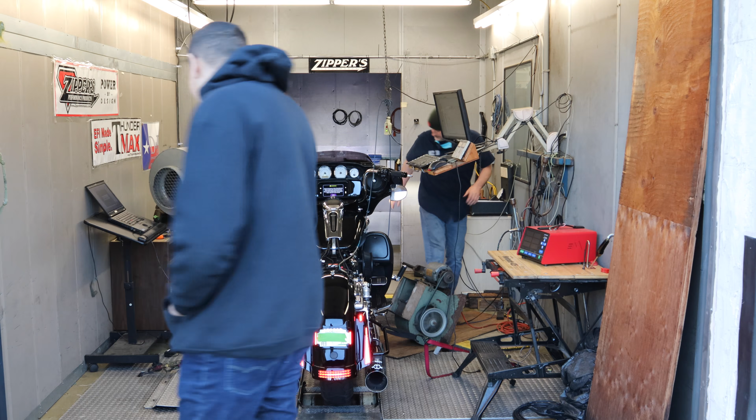Sounds good, I have to admit. I hope it doesn't change the sound too much when I put the baffles in, because with no baffles it sounds great. Now if you're looking and say it looks a little different, it's because I don't have the tips on this. This is the tip right here. First dyno run, no baffles.

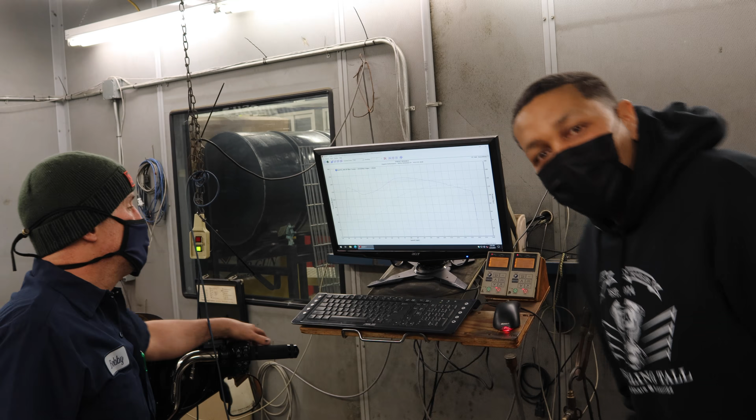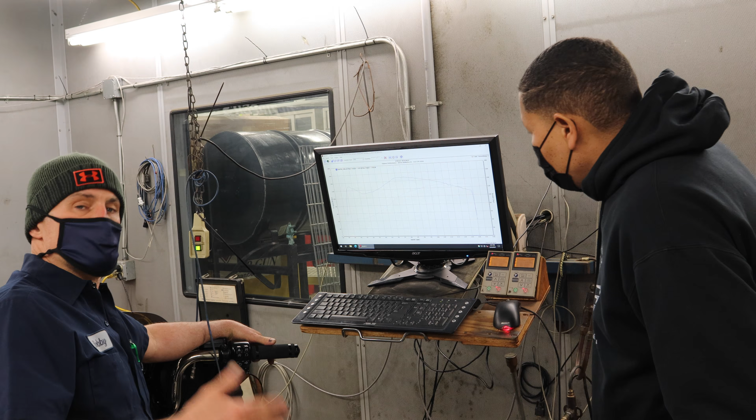Okay guys, so we're inside. We're about to look at the dyno sheet and Bob's going to explain it to you. So this is the first one with no baffles. What we wanted to do was have a baseline of where we started. And what we see here is it made pretty good power, 129 horsepower corrected SAE, and it made 149 pound-foot of corrected torque between 3,500 and 4,000 RPMs. That's a lot of torque.

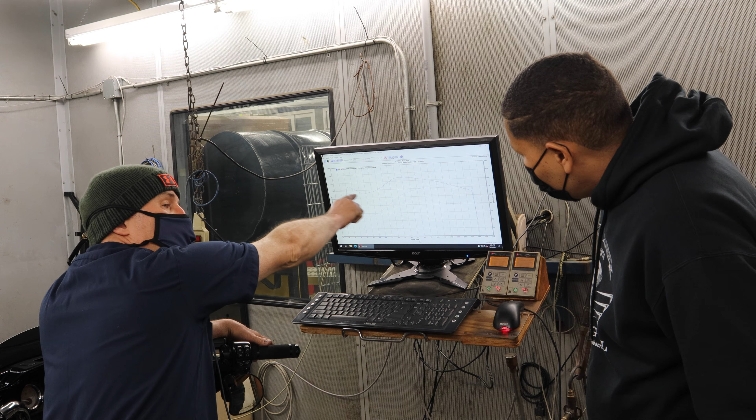But let's see where you ride the motorcycle and what it means in reference to wheels or speed. So I make my runs in 5th gear so I don't overspeed the tire. You could add 5 or 6 miles per hour to this, but you're talking about 55 to 60 miles per hour, you're right here in this torque dip. Which is going to give you the sensation that you have to downshift and feel like you have to keep opening the throttle to get the bike to move, because your power and torque starts up here.

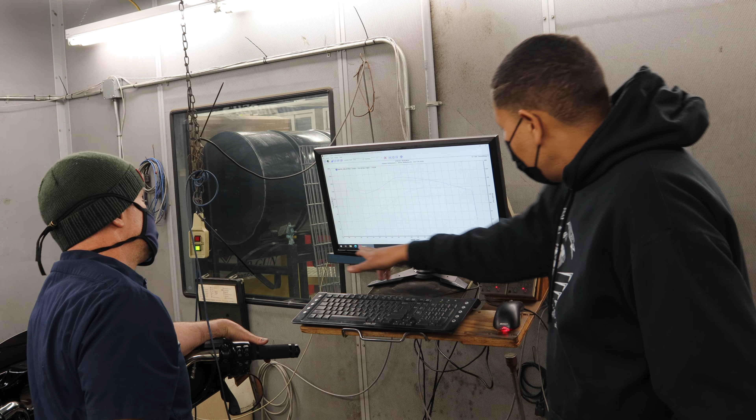Just to say, this is miles per hour down here. And right here, at 50 miles per hour, I'm at my lowest point. What do you think that's about, 110 or something? 111. Okay, now can you put it at RPM so we can see that?

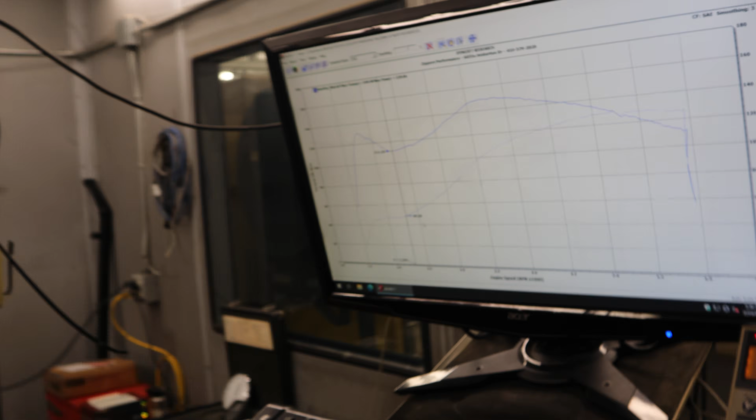Guys, I know you can't see that, let me show you a little bit better. Can you guys see that right there? Point at it, Bob. Yeah, I'll get the cursor back up there. So, cursor, it's 111.25 pound-foot of torque. That's a huge dip. Huge dip, okay. And what we're trying to do, well, yeah. And just so everybody knows, we use an SAE correction factor with that, that's not the actual number, so there's no confusion there.

All right guys, so I'm going to step out of the way and let Bob see which baffle is going to be best. And when I come back, then we'll see which one he chose. All right, see you in a minute.

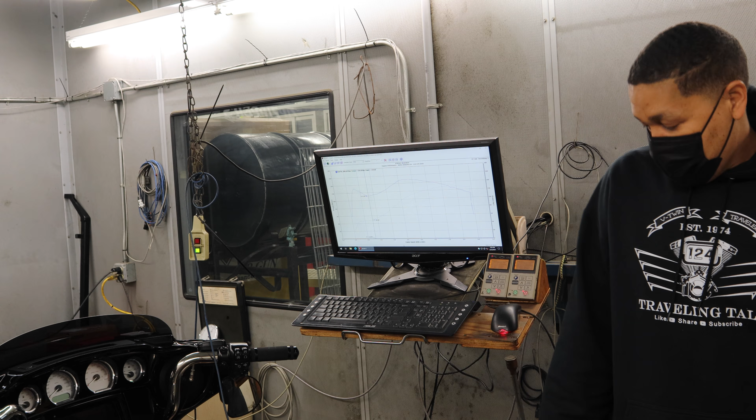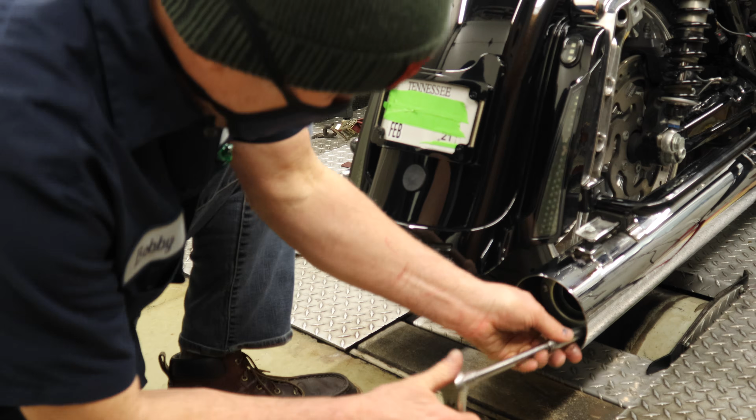Okay guys, I'm back. Now he tried both, and he decided on this one baffle. He said it's the best for my riding style. He's going to put it back in now, and you'll hear the bike with the new baffles, and you'll also see the dyno run with the new baffles. We'll tell you which one he went with in just a moment, but he's going to start it up, give you a dyno run, and here we go.

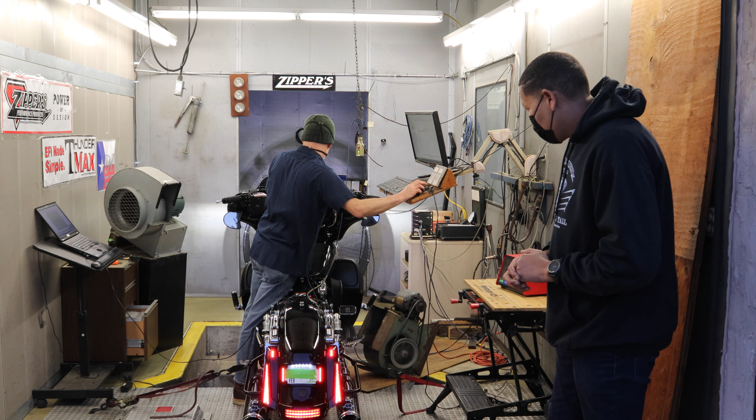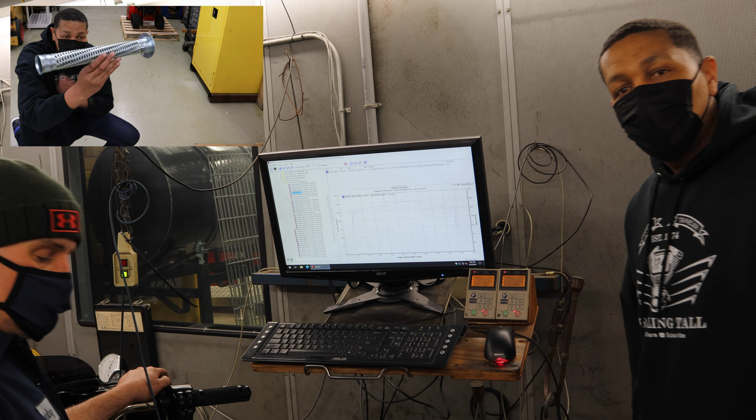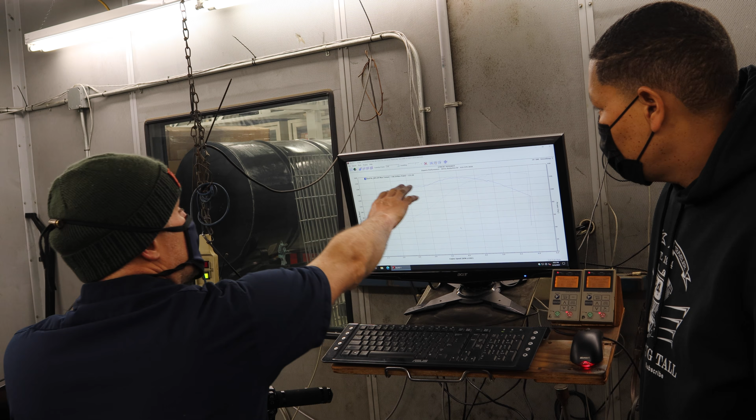All right guys, I got Bob here, and he's going to show me what we're making for horsepower and torque with the new baffles. I didn't tell you which ones we chose, so I'll let him tell you which ones we chose, and he'll tell you about the horsepower and torque. We put the louvered baffles into the mufflers, made a few dyno runs, and here's where we are. Right now we made 148 foot-pounds of corrected torque and almost 132 horsepower.

Corrected, 131 and a half. But here's where the biggest difference is going to be, in the drivability. So I'll show you what we had when we ran with no baffles.

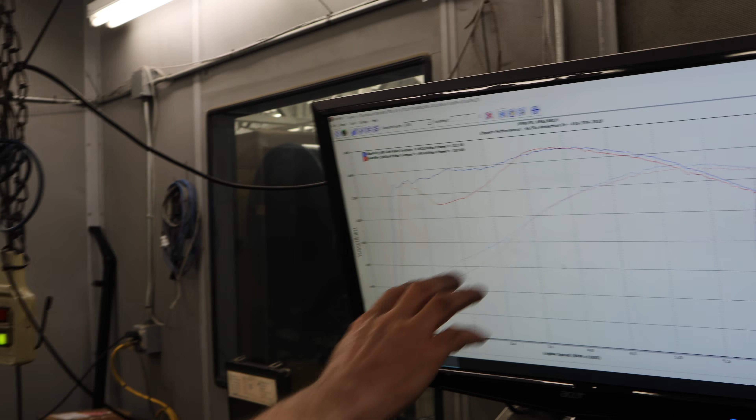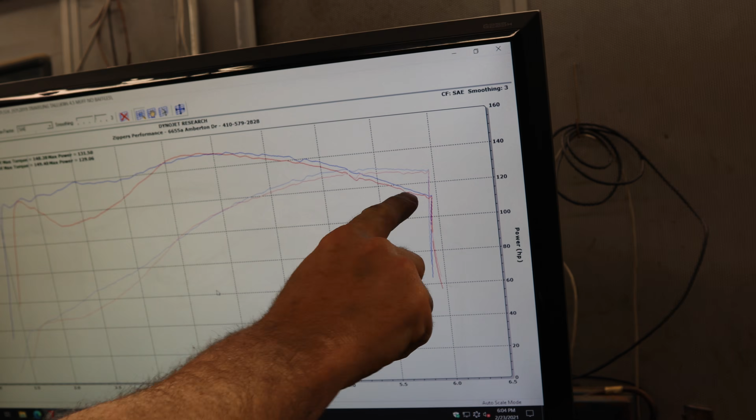So now in red are the runs without the baffles installed in the muffler. Typically what that can do is make a good peak torque number, but as you notice, it's definitely low, there's a big dip at the beginning right there, and it's a little bit lower in horsepower, which is a sign you don't want to go any less restricted than what the louvered baffle provides.

So let's put this in realistic terms. We're seeing it in RPM. Where did you get that big dip in RPM? This is at 2,500, 2,300 RPMs. So what we'll do is turn this into miles per hour.

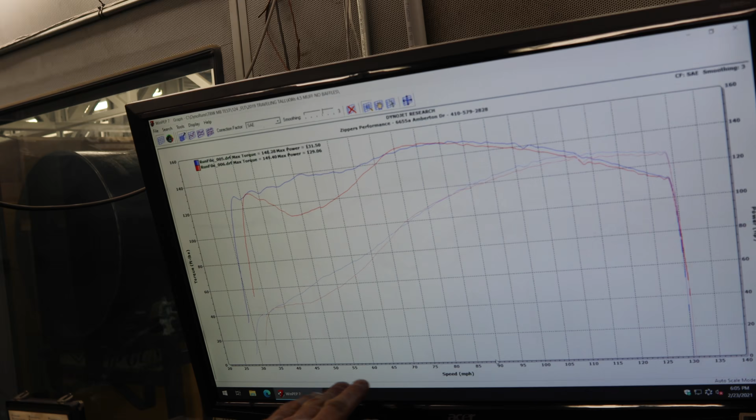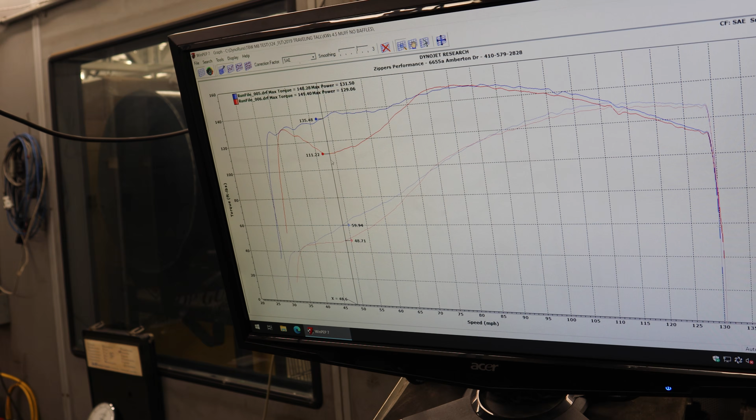Now remember, this is in 5th gear, so it's not going to be exactly as it would be in 6th. But at 50 miles per hour, you can add roughly 5 miles per hour to it, so you're at 55. If you're cruising at 55, 60 miles per hour, you have this huge dip here in torque. Let me put a cursor here so you can see it. Roughly 111 pound-feet of torque to 135.

Guys, that is a huge difference. Right here, 111, now it jumps up to 135 foot-pounds of torque. And that is right where you ride the motorcycle, how many miles per hour at highway speed in 6th gear. Exactly, yeah, that's awesome.

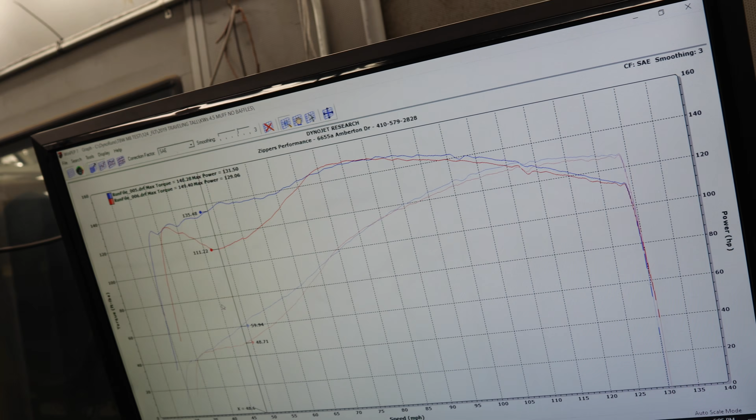If you want to pass somebody, this is the difference probably from downshifting or just leaving it in 6th gear and easing the throttle open a little bit and passing. You see this huge spike where I was making about 125, and then it dropped off, it dipped, took a really bad dip there by running no baffles. So with the new baffles put in, look at that, getting up to 134.

A significant gain there. And of course if you look at the torque curve, it just linearly continues until it starts to reach and peak out. And then you got a little bit of gain in horsepower. You picked up probably about almost 2 horsepower, but it definitely helps the engine pump air better.

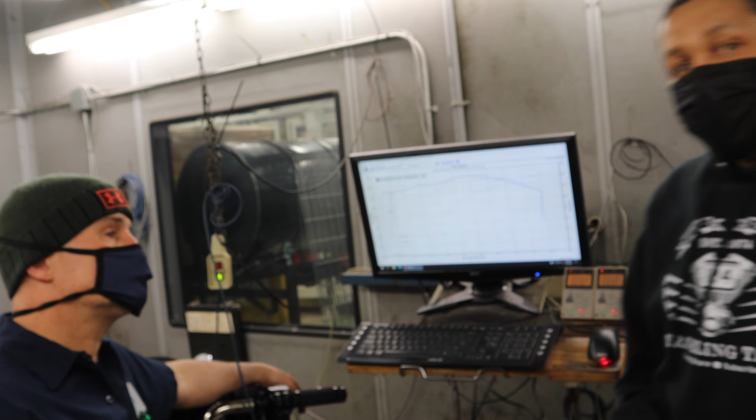We've had some good luck with the other baffle, but that's with a smaller engine. This is a much larger engine than your 114 or your 117 factory engine. So the other baffle was good, but this one, for my particular engine, was the one that I needed. And you can see the results right here.

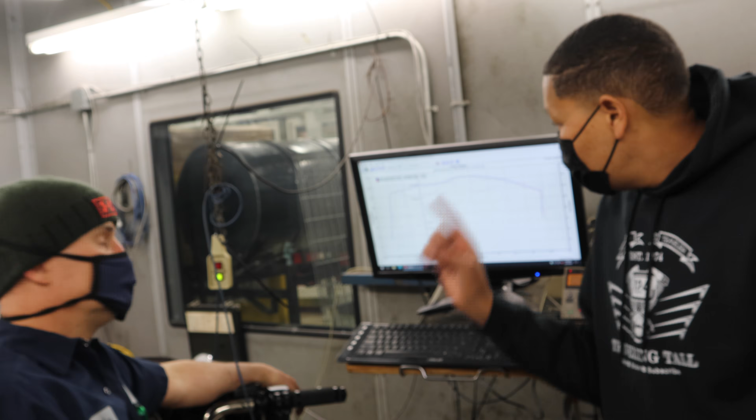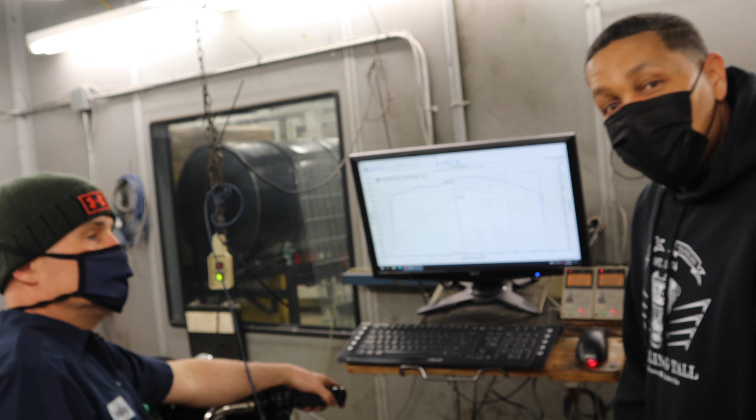Well, let me just say this. It's important when you're doing a performance upgrade to look at the dyno, not just the peak number, it's where you're getting the horsepower and the torque. And you see this right here, it comes on early and it stays. I'm happy with it, I'm making 130 foot-pounds of torque at 1600, 1700 RPM. That's awesome.